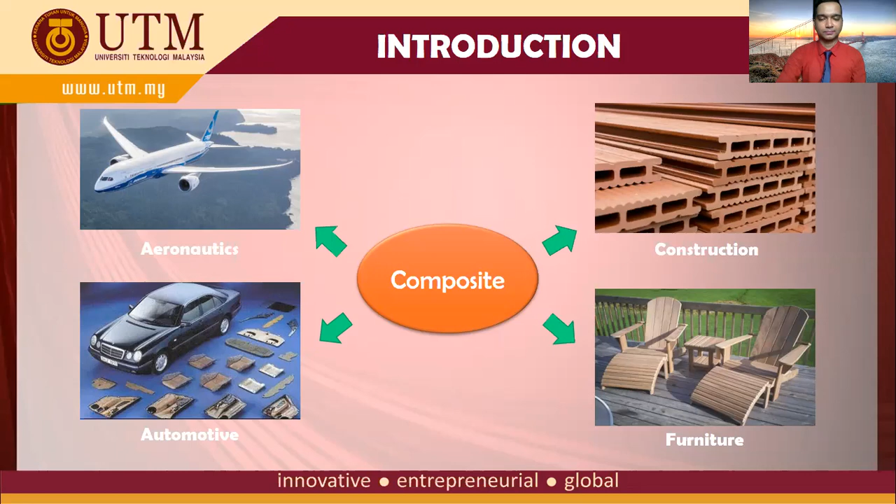This is an example of composite structures that have been used in A380 aircraft. As we can see in this figure, most of the composites used are synthetic fibers such as carbon, glass, and Kevlar.

However, environmental awareness is among the vital factors that motivate a number of researchers to explore the potential of reusing natural fibers as an alternative composite material in industries such as aeronautics.

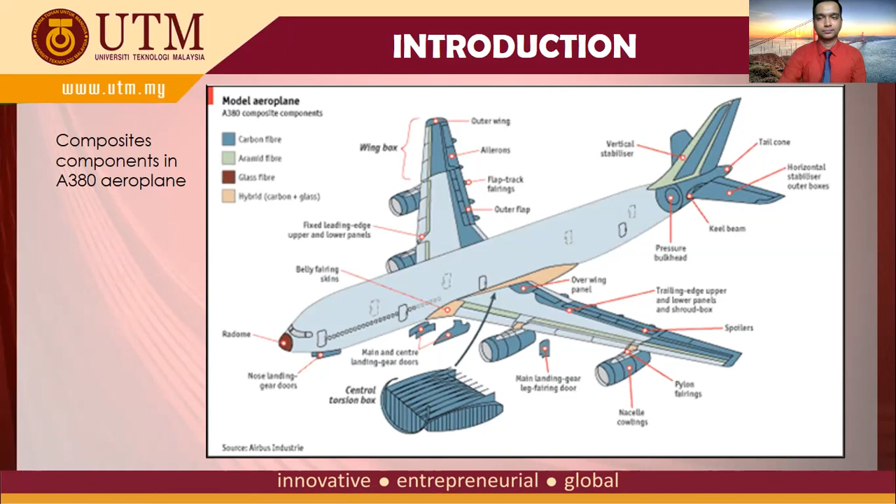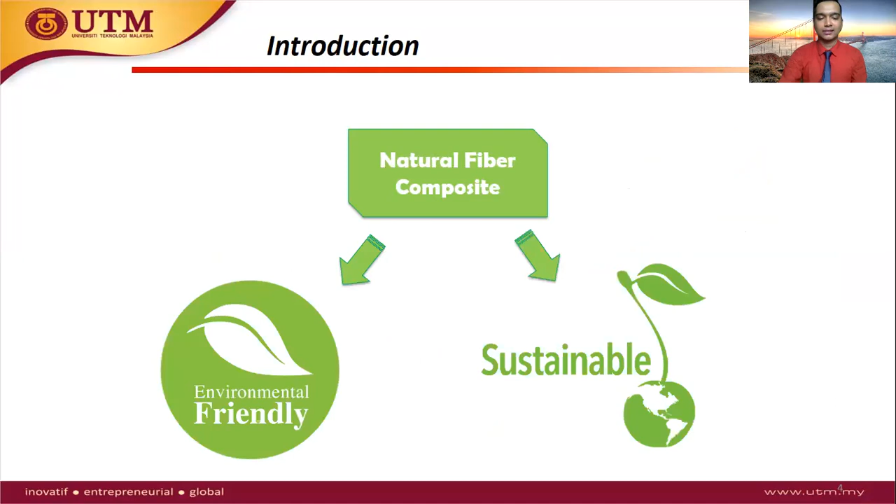Natural fibers are of course environmentally friendly and sustainable, but the natural fibers alone are weaker than synthetic fibers. It is not suitable for high-stress applications.

Therefore, in order to improve the properties of natural fibers, some studies suggested hybridizing the natural fibers with synthetic fibers to form eco-hybrid composite.

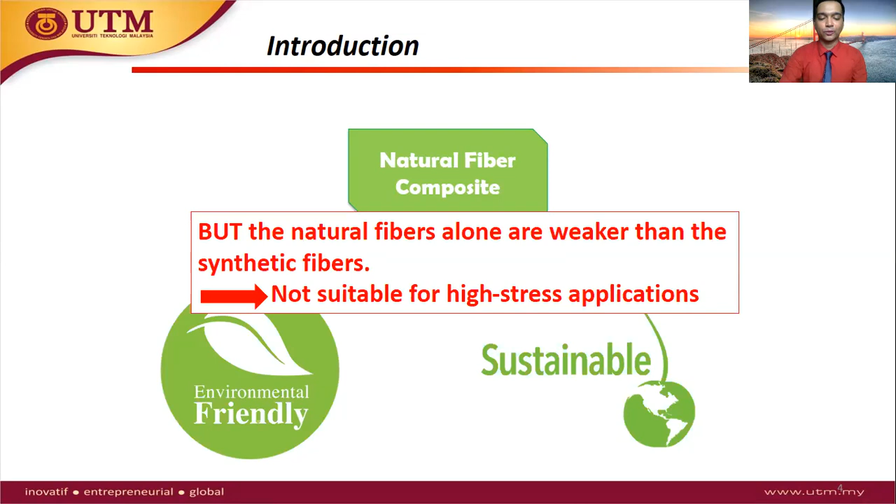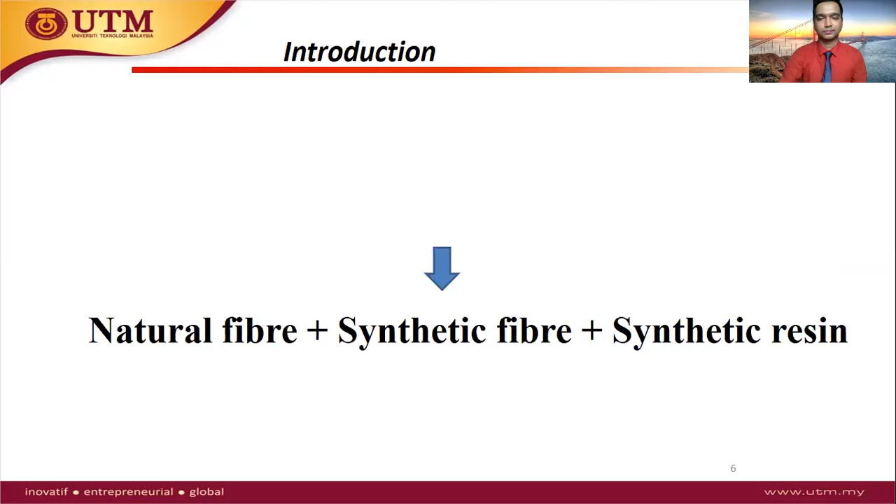What is eco-hybrid composite? Eco-hybrid composite is the mixture of natural fibers plus synthetic fibers and synthetic resin.

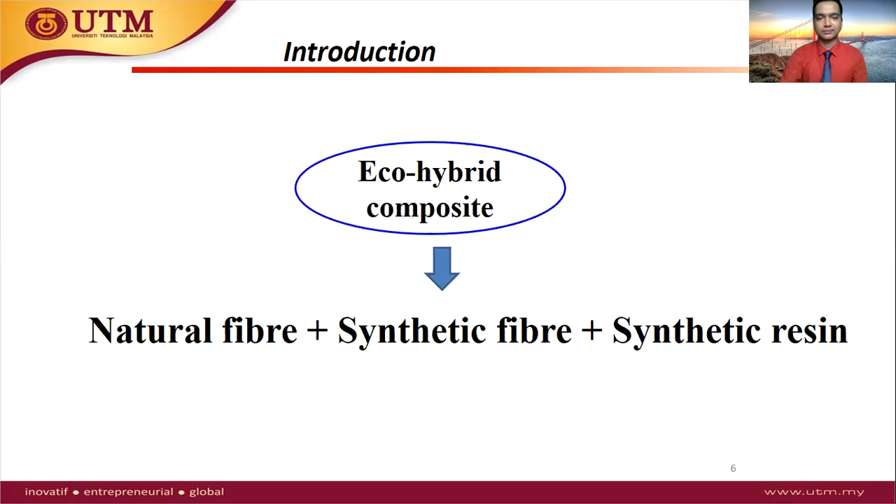The advantages of eco-hybrid composites are its reasonable physical and mechanical behavior, lower production costs, lower density, and environmental friendliness.

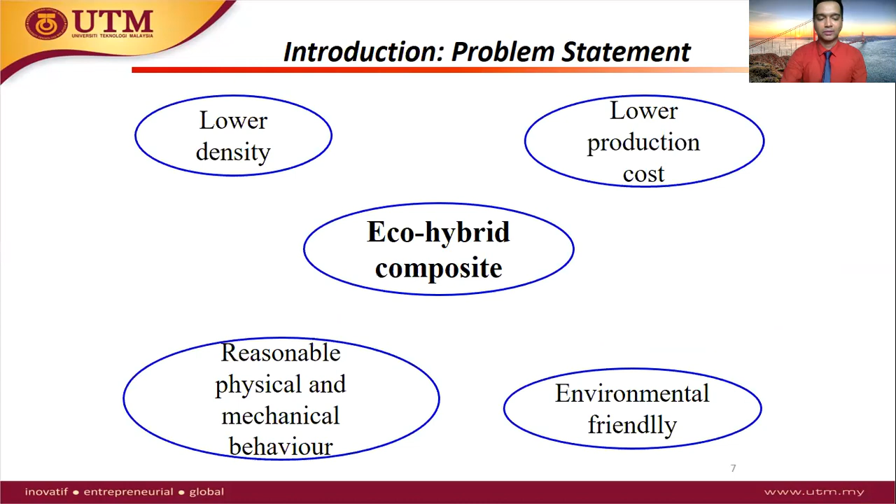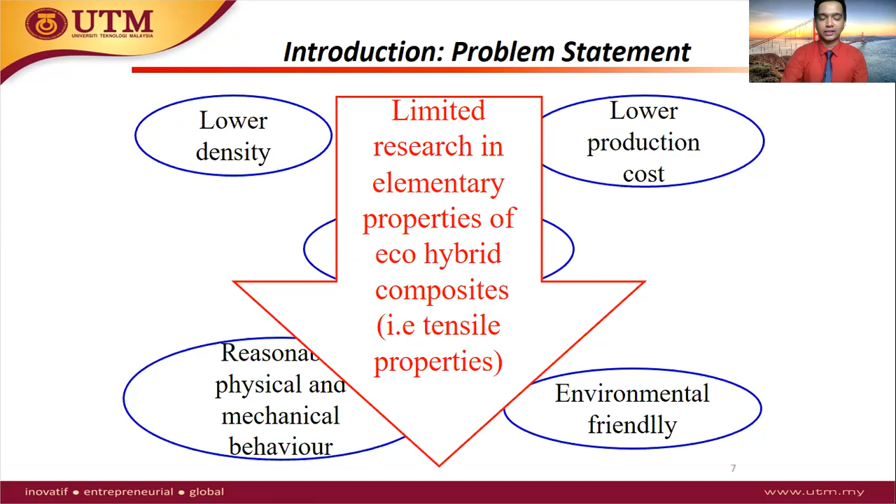But limited research in elementary properties of eco-hybrid composites, for example tensile properties, led to the objective of my study, which is to investigate the tensile behaviors of eco-hybrid composite based on flax and carbon fibers in terms of the effects of stacking sequences.

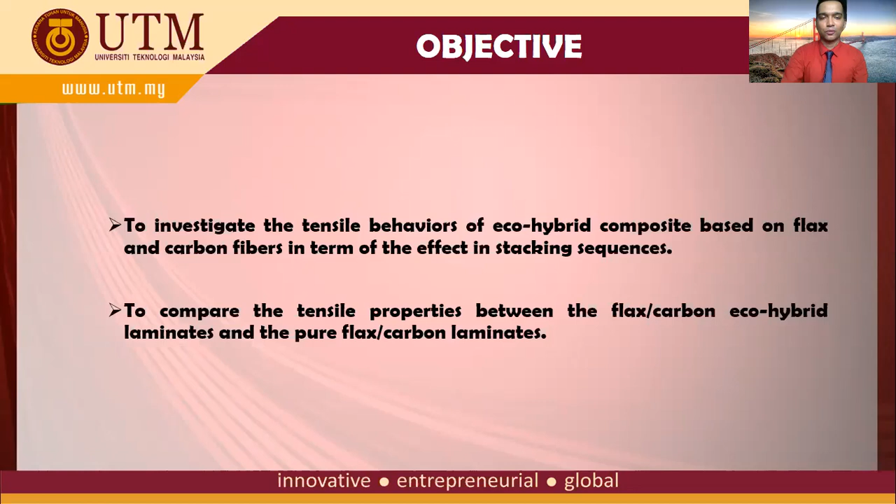To compare the tensile properties between the flax/carbon eco-hybrid laminates and the pure flax/carbon laminates.

The scope of my project is to fabricate flax/carbon eco-hybrid laminates and the pure carbon and flax laminates. Second, design and conduct tensile tests for eco-hybrid composites and the pure composite laminates. Third, result analysis and discussion on the tensile behavior.

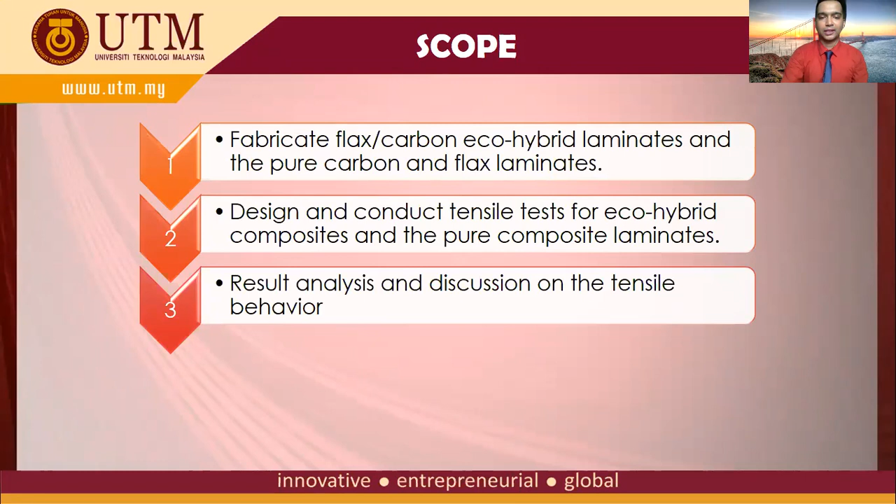Methodology begins with specimen fabrication, tensile tests, and interpretation of data.

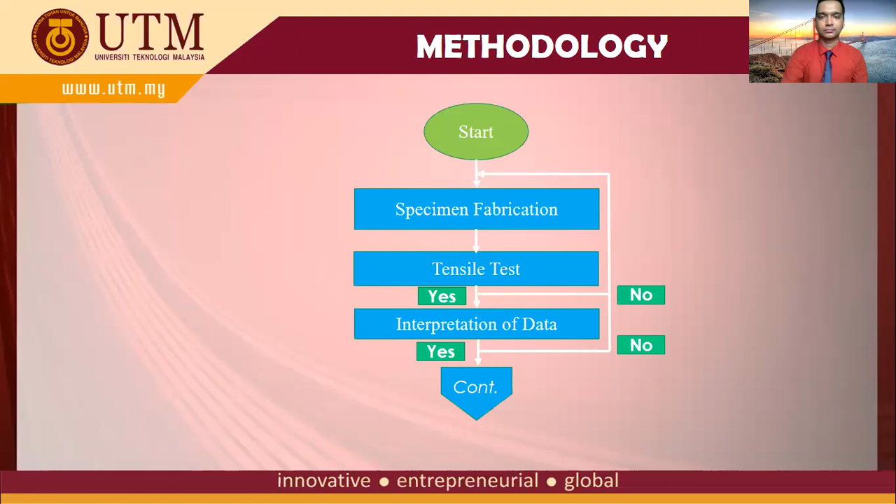For sandwich-like configurations, the flax layers are located in between the carbon laminates as shown on the left-hand side. For intercalation configurations, the flax plies are arranged alternately to each other as shown on the right-hand side.

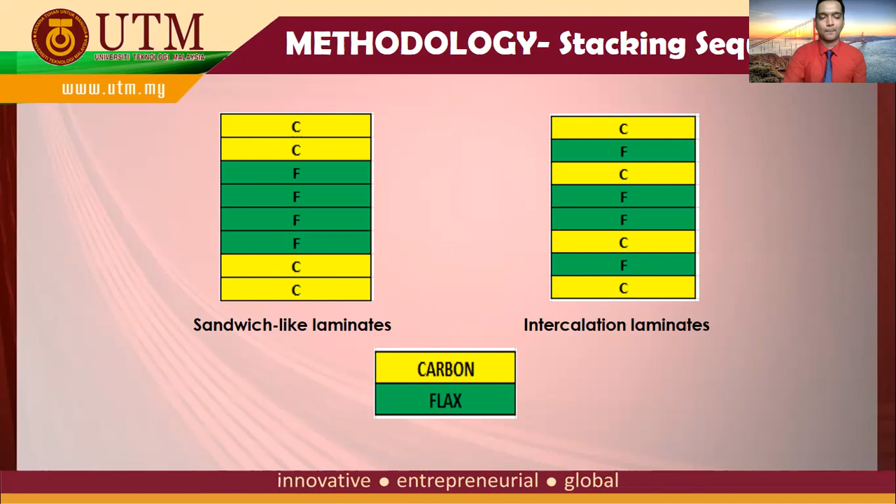For the fabrication process, we are using the vacuum infusion process. It begins with preparation of the mold and loading the fibers into the mold. Next, the dry material is sealed closed using a vacuum. Still under vacuum, resin is infused into the mold cavity.

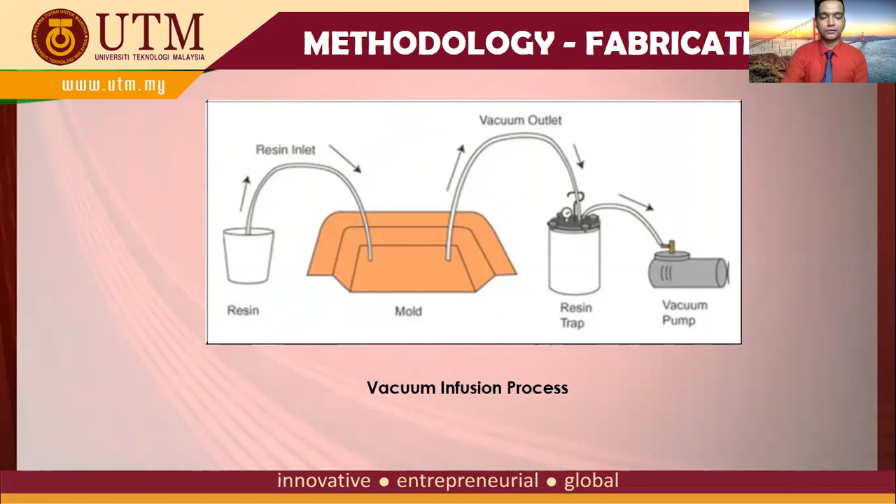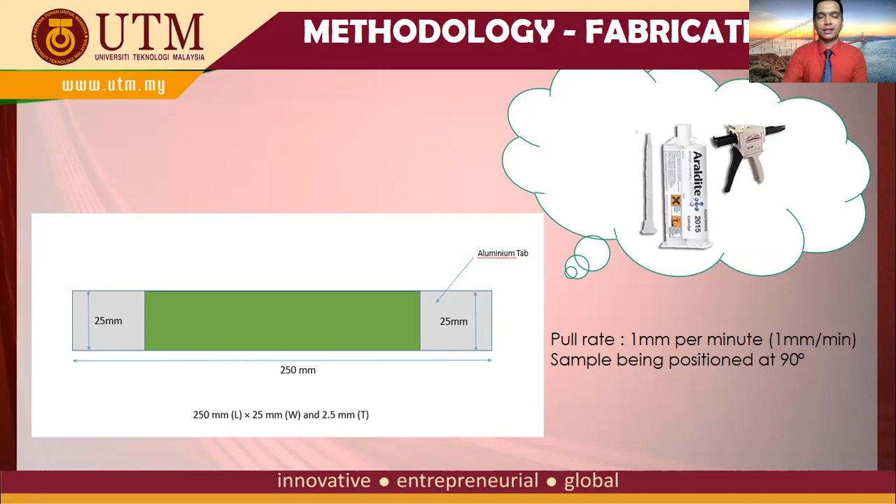The pull rate is 1 mm per minute and the sample is positioned at 90 degrees. The tensile test setup is as shown in the figure.

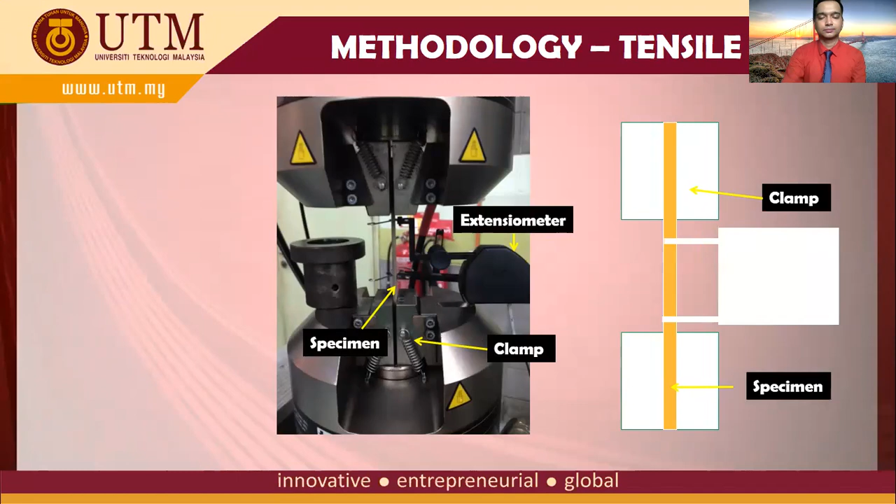The machine for the tensile test is the machine in UTM itself. The machine used is the Instron 8801 Universal Testing Machine. The test standard is ASTM D3039, standard test method for tensile properties of polymer matrix composite materials.

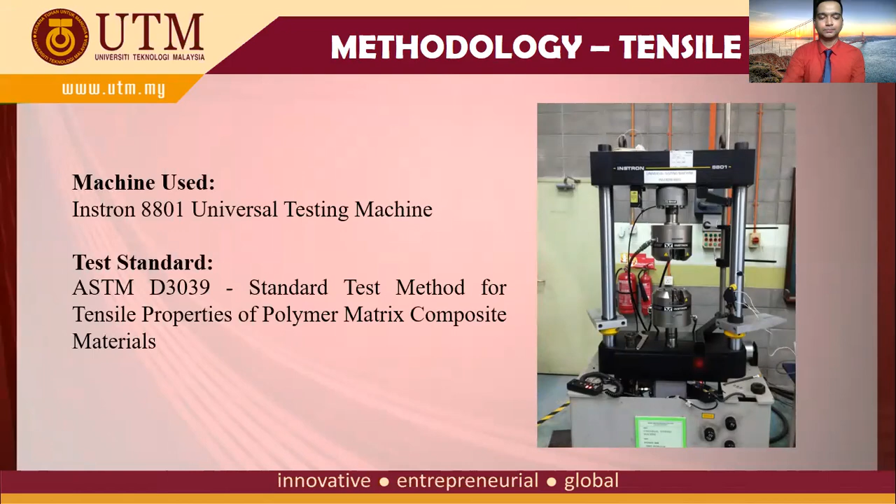The result for the sandwich-like stacking sequence shows that the tensile stress can go up to nearly 450 megapascal. For the intercalation stacking sequence, the tensile stress goes up to around 350 megapascal. We can see that both laminates have a similar trend of curves.

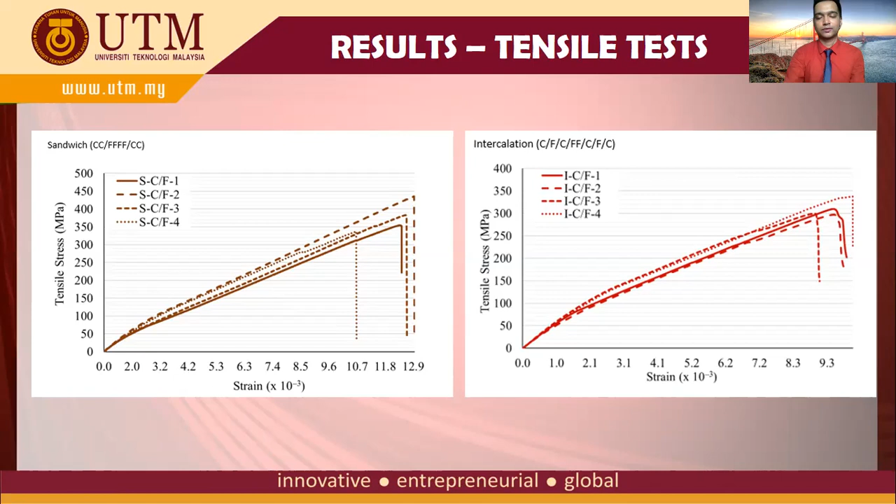Here is the summary of the results and the average value for all specimens. For the first property, tensile modulus, as expected, pure carbon obtained the highest tensile modulus, around 85 GPa, and the lowest is pure flax, at 7.52 gigapascal.

We can see the reason why there is a need for hybridization: it can improve the tensile modulus. Sandwich-like stacking sequence gives 28.43 gigapascal, and intercalation stacking sequence gives 35.67 gigapascal.

On the other hand, for ultimate tensile stress, as expected, pure carbon is the highest at 510 megapascal, and pure flax is 73.35 megapascal. But for the eco-hybrid laminates, it can improve almost 425% compared to pure flax: sandwich-like equals 385.26 megapascal, and intercalation equals 302.78 megapascal.

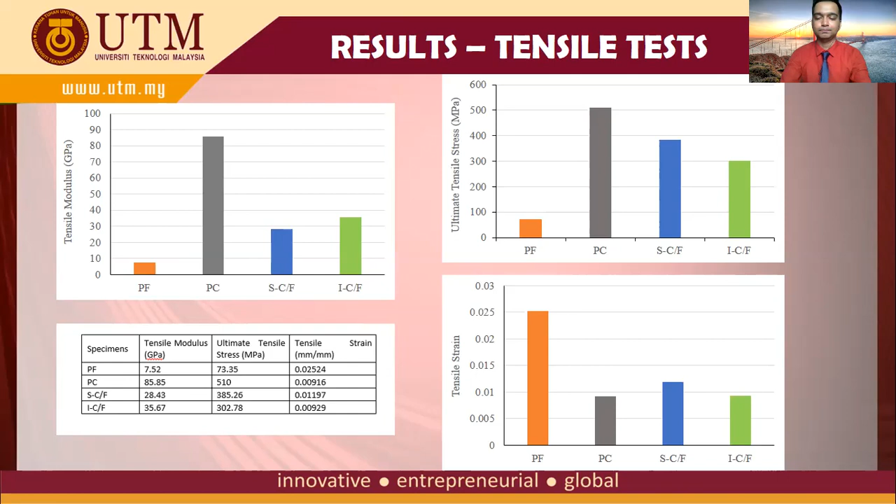As you can see from this result analysis, the effect of hybridization was remarkable for flax as it improved the tensile properties of flax. For example, the tensile modulus improved nearly 400%, and for ultimate tensile stress, it improved more than 400%.

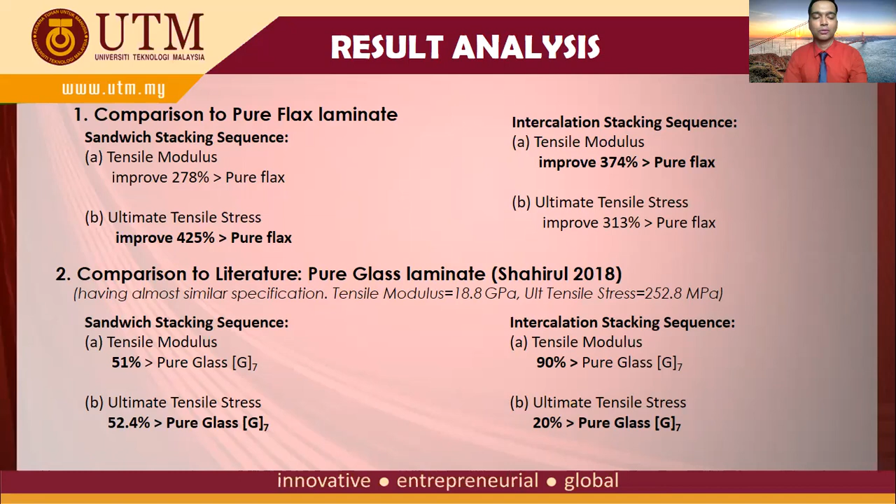In comparison to the pure glass laminate, we can see that for intercalation stacking sequence, carbon flax eco-hybrid has 90% better tensile modulus. And for sandwich stacking sequence, carbon flax eco-hybrid composite is 52.4% better than pure glass in ultimate tensile stress.

As for the conclusion, in general, eco-hybrid composite gives better tensile properties compared to natural fiber. From this study, it shows that the arrangement of plies, sandwich-like and intercalation, can affect the tensile properties.

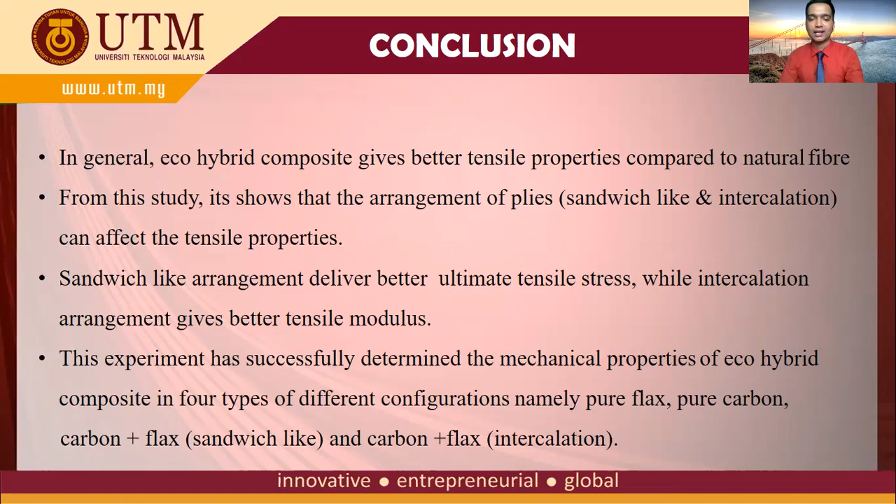Sandwich-like arrangements deliver better ultimate tensile stress, while intercalation arrangement gives better tensile modulus. This experiment has successfully determined the mechanical properties of eco-hybrid composite in 4 different configurations, namely pure flax, pure carbon, carbon plus flax sandwich-like, and carbon plus flax intercalation.